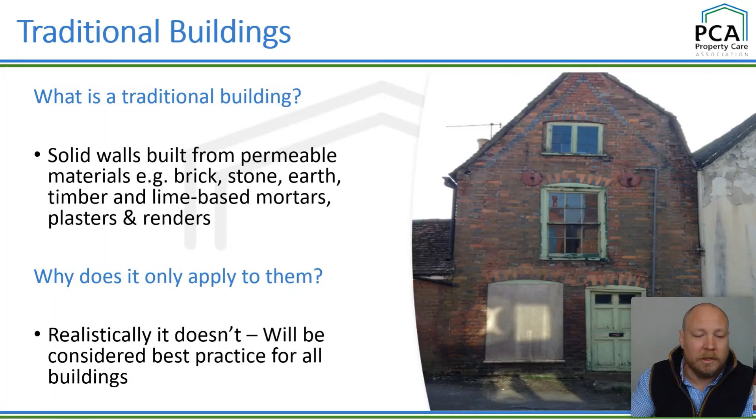And likewise, when the draft was written for this document, it was very much aimed and focused at the pre-acquisition survey. They have now realised that this document has merit beyond just those doing pre-purchase surveys. If you're looking at any sort of damp related defect, there is merit in this document for you, because at the end of the day, good practice is just good practice. So if you're following what is set out in this document, it's going to put you in pretty good stead. So whilst this document has traditional buildings as the title, I genuinely believe that the value of it goes well beyond that. And with that in mind, that is part of the reason why we are supporting it.

I've already touched on some of the reasons as to why I believe this document has value, but to give it a bit more background, particularly from the point of view of the association as well. If you start thinking about where the association has come from, we are rapidly approaching our centennial year. If you look at our early days, we were based around wood protection. We were looking to try and preserve the original building materials that were put in situ. That is our heritage. That's where we come from.

So actually preserving our historic building stock is what we do. There's no conflict in that regard. But the reason we are rapidly approaching our 100th year is because we have always strived to promote best practice. Now, if this is what the wider industry now perceives as best practice, then I think it's only right for us as an association to pick up the ball and run with that, and seize the opportunity, because we're the ones that want to promote best practice, and if this is what it's deemed as, then we should be

seeking that opportunity. Now, the other thing to bear in mind is the boys and girls of the association, their bread and butter is damp and timber surveys. They are doing probably 2-3 surveys a day where they're looking at dampness in buildings. We are doing this more regularly than anybody else. So by default, we will be judged by the content of this document more than anyone else. So it just makes sense to embrace it. So it's only right for the PCA to adopt this document as far as I see.

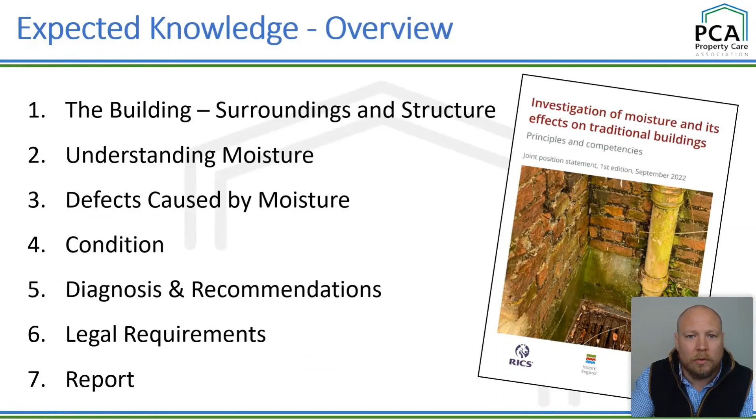So section 1 of the document is this, the building itself. It gets you to start thinking about context, and it feels like this is sort of the current buzzword at the moment, or has been for a couple of years, I guess, this holistic approach to moisture in buildings. It wants you to start thinking about not only the building itself, but its surroundings. It wants you to start thinking about the context of where that building is.

So it wants you to start thinking about topography. Topography is obviously the study of land, or land features, I should say. So is it on the top of the hill? Is it at the bottom of the hill? Water bodies, that sort of thing. So you've got that example there on the left-hand side. You've obviously got a large water body there, and you're halfway up a hill. So that is probably likely to get a bit of a battering from the elements. If you're at the top of the hill, you're obviously going to be prone to wind-driven rain a lot more. If you're at the bottom of the hill, then there's perhaps the risk of surface water runoff, that sort of thing. So there's some considerations there.

It wants you to consider ground levels as well. Have you got elevated ground levels and the potential for lateral penetration? It wants you to consider drainage. I consider that sort of twofold, I guess. There's the provision for drains, and the site. Is the site well drained? Have you got saturated ground surrounding the property, or is it a well free-draining site? Is the drainage system doing what it's meant to be and discharging that water before it becomes problematic? Things you should be considering as well.

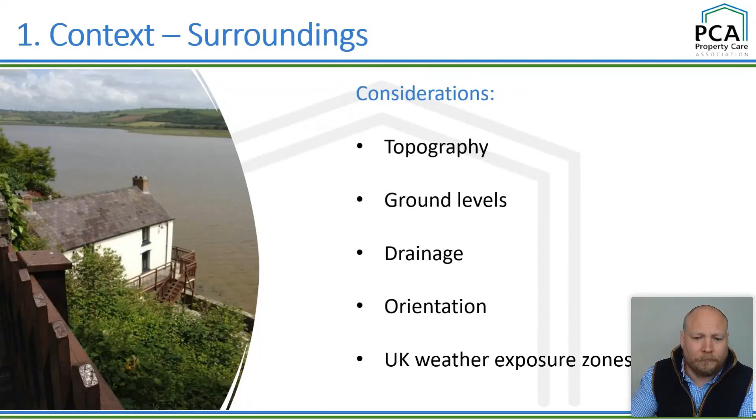On UK weather exposure zones, I'm sure you've already seen this. I know we've flashed this about in previous webinars as well. I said it's from BRE 262, but I think it's actually from BS 8104, Code of Practice for Assessing Exposure of Walls to Wind-Driven Rain. So it's quite a famous one, and I think you can get it free in some NHBC documents as well, which are free on their website. So it's easily accessible. But it tells you what the severity of wind-driven rain is in your location. So if you're anywhere along the west coast, you're likely to get very severe wind-driven rain. If you're in the flats of Cambridgeshire, like where I am now, you're relatively sheltered. And again, this is stuff that you can do probably before you get to site. You're going to know this stuff in the back of your head anyway. Again, it's just making sure that you're following that through within your written correspondence.

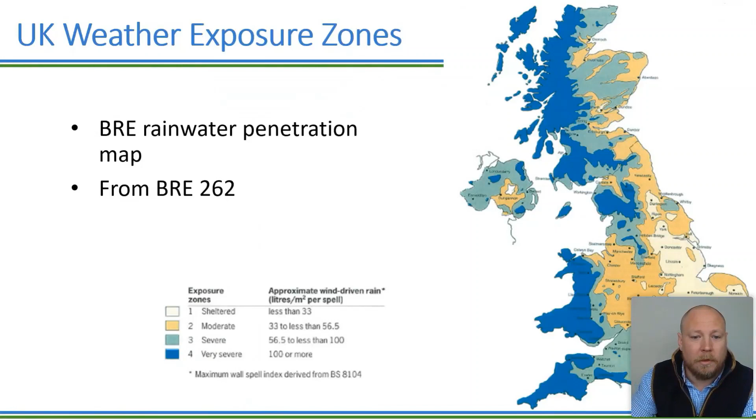So that's thinking about the property within its surroundings, but it also wants you to start considering the context of the structure as well. So age of construction are the obvious ones. Is it masonry, is it earth, is it timber, etc.? That's fairly self-explanatory. But it also wants you to start thinking about use and historic and former uses for that property as well. For example, if it's a barn conversion, particularly if there's a history of animal storage there, then there's a chance that you're going to have a heavy concentration of salt contaminants just through where there's been urine and things like that. The underlying structure may be pretty dry, but it may look wet just as a result of heavy salting.

It also wants you to start considering alterations and additions as well. And again, it's pretty self-explanatory. It's not rocket science here, but it wants you to start considering things like, has there been the addition of retrofit insulation that may impact the way that building is performing? Has someone put a hard dense cement pointing in there instead of the original lime pointing, which might be detrimental to the fabric of the building and cause deformation of the faces of bricks, etc.? And these are the sorts of things it wants you to consider, and are fairly standard and straightforward.

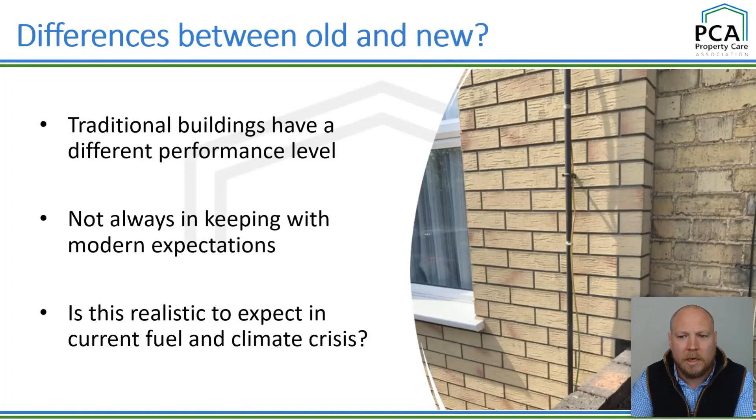Groundwater, so capillary rise or lateral penetration, whatever it may be. Services, of course, leaks and drains. We all know this. This is straightforward stuff. It also wants you to understand about the moisture from human production and how the balance between ventilation, moisture production and heating are all interrelated. We could go into that now, but we don't need to, because that is very well covered in other webinars. We've covered ventilation in a huge amount of detail.

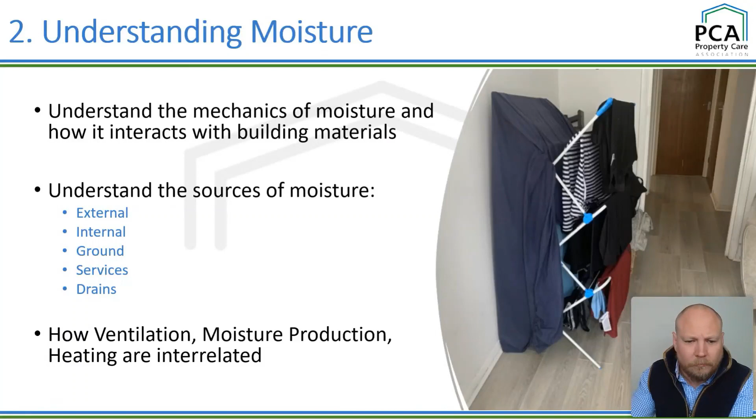It also tells us that there is an array of instruments, or locating and measuring devices for moisture as it calls it, that we should have an understanding of. And I think we should probably make this a pop quiz, shouldn't we? Who can name all of those? No prizes, of course, but you get a certain amount of pride. Can you name what all of those are? And who's got every single one of them? That's not an exclusive list. There are a few more, but we will start touching on those in a bit more detail.

So the staple, I guess, for everyone is the moisture meter, which is that bottom center right, the default for most surveyors. We've all got one, but we also know that they have very serious limitations. They are very useful. They are great for building up a quick indication of distribution of moisture, but they have their flaws. I have heard it said that these are what instigated this document to some degree, but I don't think anyone has ever been under any illusions that they're the panacea. Our moisture meter document has recently been revised, but it is probably 30 years old, and it is a great insight into the limitations and the advantages of electronic moisture meters. So Andy, if you're there, you might need to put that one in the comments as well.

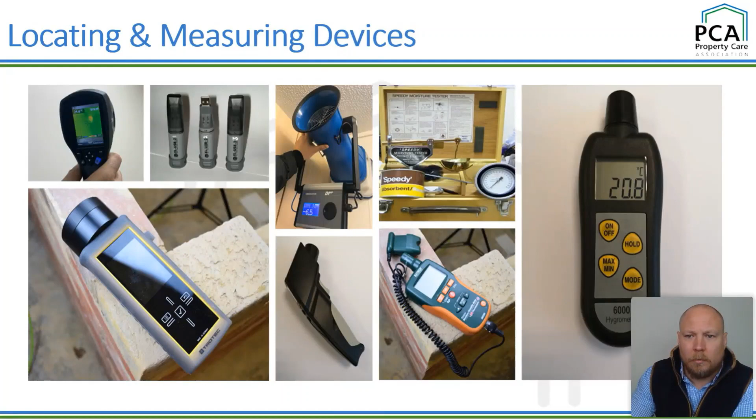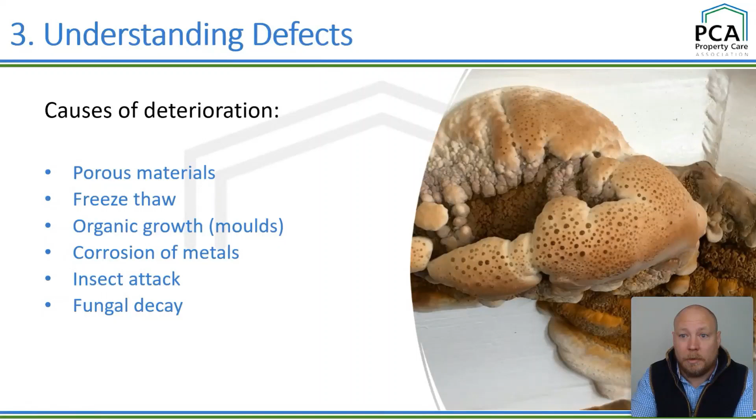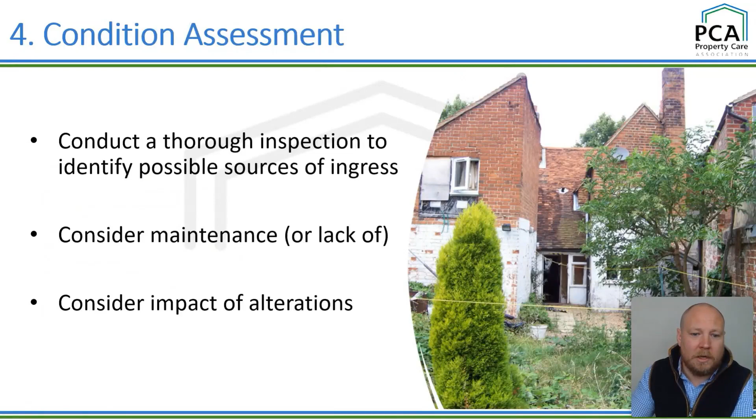We're also told to consider a condition assessment. Now, it goes without saying you're going to know if you turn up on a building and it's pretty run down and derelict, but it wants you to conduct a thorough inspection to identify possible sources of water ingress and a lack of maintenance and things like that. It wants you to encourage getting that addressed and consider the impact of alterations as well. So this is going back to things like the inappropriate cement pointing that we spoke about earlier. So that's fairly self-explanatory. Just assess the condition of the structure.

Section 5 is diagnosis and recommendations, and again, it's back to this buzzword, and it wants you to do this holistic diagnostic. So it wants you to deal with the cause rather than the symptom. And the two examples that I can think of with that are mold growth being one, or condensation. We know that that's caused by high humidities, but there's no point, if it's a mold growth issue, just wiping off the mold growth, because ultimately you're not dealing with the issue.

What you need to be considering is how is that building able to deal with the excessive moisture, or is it excessive moisture production? Is it inadequate heat? And giving it a bit more thought. So actually using some of that equipment that we looked at earlier to try and get to the root cause of what might be causing the issues.

The other one might be higher ground levels. So it may be that you've got elevated ground levels, and being able to drop the ground is obviously the best answer; if you can do that, you're dealing with the cause. However, in reality, it could be a public highway or whatever, high ground levels that you just can't change. So ideally, you want to be dealing with the high ground levels, reducing where you can, but in the vast majority of instances, you can't.

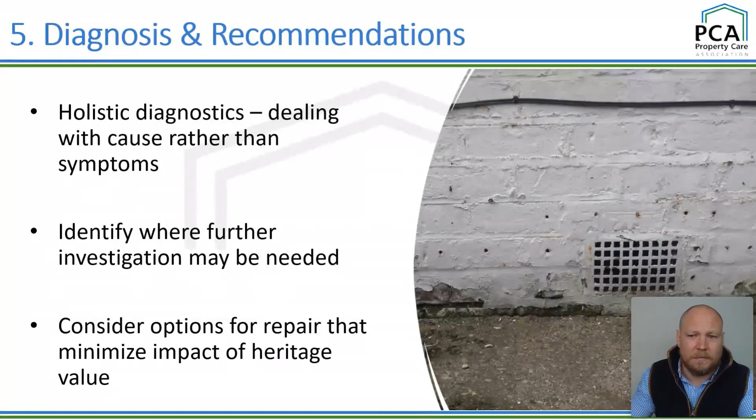And this one, I don't think anyone is going to have too much disagreement with: consider the options for repair that minimize the impact on heritage value. Now, I deliberately chose the picture we've got there. Thankfully, we've moved on from days like that, but we've got a fairly historic form of remedial damp-proof course put in there, and the problem is that, let's be honest, it does leave visual scarring. That's going to be there forever. Thankfully, modern methods don't do that, and you try and think about how you might get away from that. Could things be done internally if there are works of that nature that need to be done? So yeah, it is common sense stuff.

Well, this is something that was discussed at the conference last week. We had Professor John Edwards give a very interesting presentation on the topic. He told us that it's very subjective, but there are essentially 4 values that we should be considering when we're looking at heritage significance: aesthetic value, communal value, evidential value, and historical value. It's something I'm keen for us to try and cover in more detail in future training courses, wherever it may be.

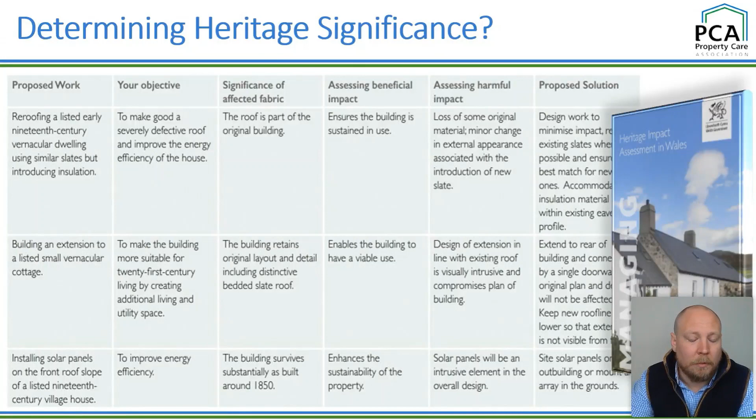Moving on from that then, because I have had my warning that we're slowly running out of time, or quickly running out of time. Section 6 is the legal requirements, and this is where it gets you to think about things that you've been thinking about day in, day out anyway. Things like the Party Wall Act, things like CDM regs, all the health and safety legislation.

And again, apologies for probably teaching Granny to suck eggs, but it doesn't change anything with regards to legally protected and listed buildings. Everything as far as they are concerned stays the same. You still have to follow the same legislation as you always had to do. So this document doesn't change anything in that regard. You still need to do a heritage impact assessment for listed buildings, and you still need to be able to justify the works. So if you're looking at a listed building, the game hasn't changed at all.

Section 7 is reports. I sit in a bit of a privileged position where I get to see a lot of damp and timber reports. So this is a bit from my experience on areas where I think we need to start including that we probably aren't already. A lot of it, as I've already alluded to, is around that front end stuff, the contextual stuff, particularly not just the property, but the setting of the property. So things like the topography, the ground conditions, the drainage, the orientation, UK weather zones.

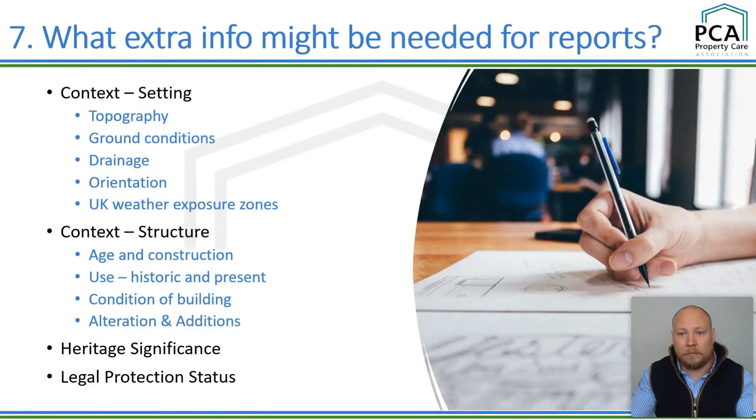So another thing that this document gets us to consider, particularly at the report stage, is it wants us to consider providing the client with alternative options. So if there is more than one way to skin a cat, provide them the advantages and disadvantages of the different options, and that includes time and cost. If there are several options for the remediation, it wants you to try and prioritize those solutions as well. So if you want to try and do one thing and let the structure dry down, then absolutely that should be encouraged, explained to them and prioritized.

The other thing, and this has been something that has been discussed for a little while, is this start of longer term relationships. Now, it's something I know Steve has discussed before, and there is this reliance on guarantees, and wouldn't it be nice to move away from that and just have these longer term relationships where damp could be dealt with as a phased process. A lot of damp issues can be complex, and if you're afforded the time, then you can take it one step at a time, with monitoring periods and dealing with the obvious first and working back. That would be lovely. Wouldn't that be great?

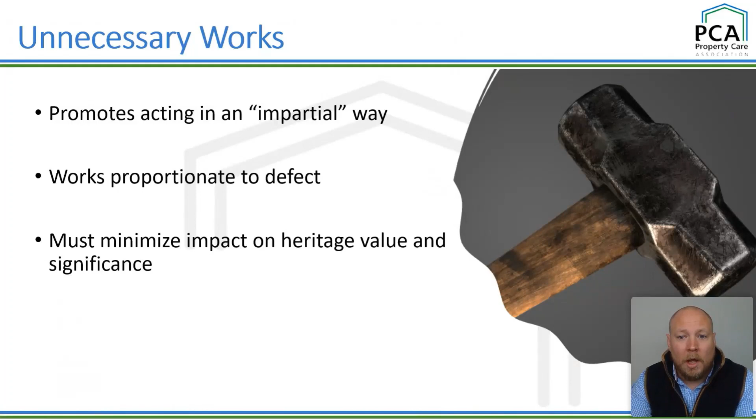Don't use a sledgehammer to crack a nut. If you can get away with a relatively minor repair, particularly on a heritage structure, then that should be where we go. And the other thing to bear in mind, as far as members of the association go, that is nothing new. That has been embedded in the code of ethics for members of the association for as long as I am aware. Works have got to be proportionate, and you should not be making up works that aren't required. And we have taken action and disciplined members as a result of that. So as far as that's concerned, there are no changes.

So Andy, I'm on to my final slide, so don't fret. I think we're pretty close to time. But

For anyone that has seen any of the additional marketing out there around the joint position statement, they have very much made out that this is hopefully the start of possible future collaborations. That is what is great about this document, is that it brought everyone together. And we look at what joins us rather than pulls us apart. We are more likely to progress than if we all sit in our separate silos. And it is great to try and work together, because ultimately, if we can improve the standards in industry, the people that benefit the most is the consumer. And I don't think anyone can disagree that that is a valid thing to do.

I also mentioned at the start that I saw this as a continuation of best practice. This is what the wider industry now accepts as best practice. Best practice can never remain static. It will always evolve. Where we were 10 years ago is certainly not where we are now. It will always have to change. And this is just a continuation of that.

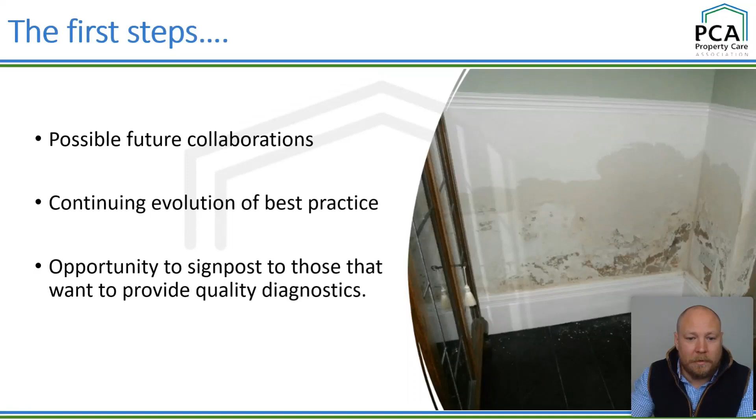And that is me. Thank you for putting up with my long monologue for the best part of 45 minutes. I don't think there is anything particularly new in the document. It's all common sense stuff.

Thank you very much. No, thank you, James, and thanks for going through that. I will definitely say this. Certainly when you were talking about all the measurement devices, the chat certainly did open up.